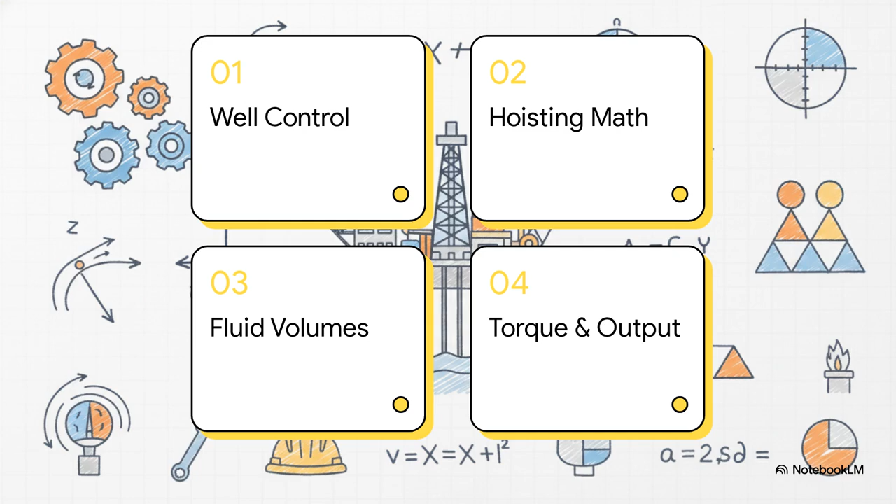Section 1. Pressure limits and well control. The power of squeezed gas. Think about this. If the rig loses all power and you've got a high-pressure gas bubble climbing fast to the surface, how do you slam the blowout preventer shut? Well, the answer lies in the accumulator and the math of squeezed gas. The accumulator uses nitrogen gas to squeeze hydraulic fluid, storing up emergency power. But how much power do you actually have?

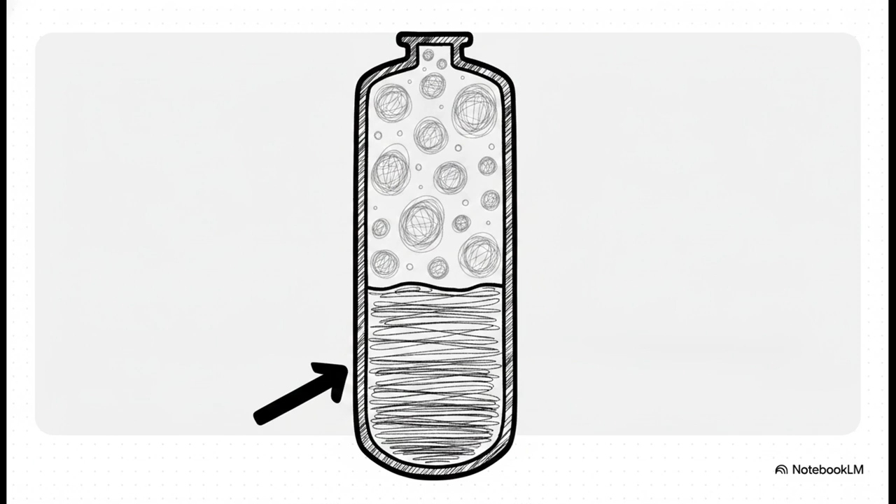According to Boyle's law, which tells us that pressure and volume are inversely proportional, a gas compresses, but a liquid doesn't. So an 11-gallon accumulator bottle, pre-charged with 1,000 psi of nitrogen, does not give you 11 gallons of fluid, because the gas takes up space. It actually only gives you about 5 usable gallons.

So this crucial point is summarized perfectly by this rule of thumb. A full accumulator gauge does not mean a full accumulator. A gauge reading 3,000 psi only tells you the fluid is pressurized, not how much nitrogen is pushing it. If your nitrogen slowly leaked out over time, the gauge might still read full, but you'd have zero pushing power. Trusting that gauge without physically verifying the nitrogen precharge, that is a fatal trap.

And what exactly is that accumulator fluid pushing against? The blowout preventer stack. An annular preventer is rated to hold back working well pressures of 5, 10, or even an extreme 15,000 psi. Yet, it only takes about 1,500 psi of hydraulic closing pressure to shut it. Why? It's a deliberate mathematical design. That much lower closing pressure squeezes the reinforced rubber iris shut around the pipe without over-crushing and destroying the rubber element itself.

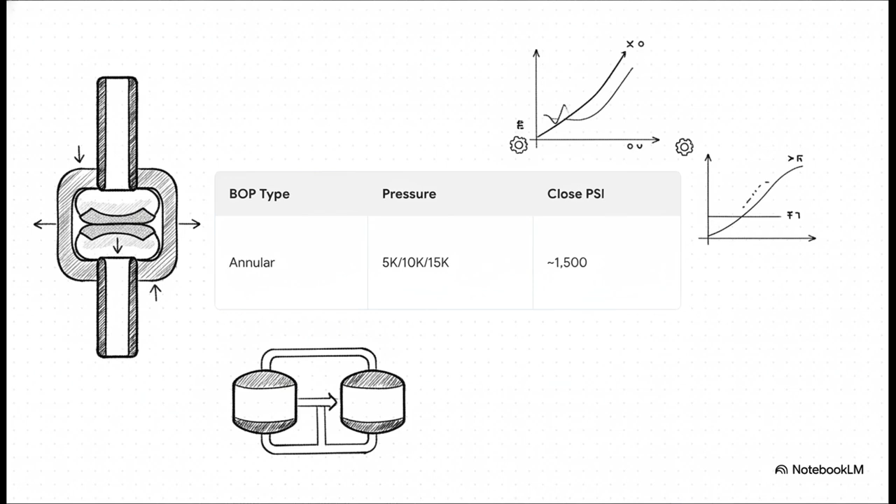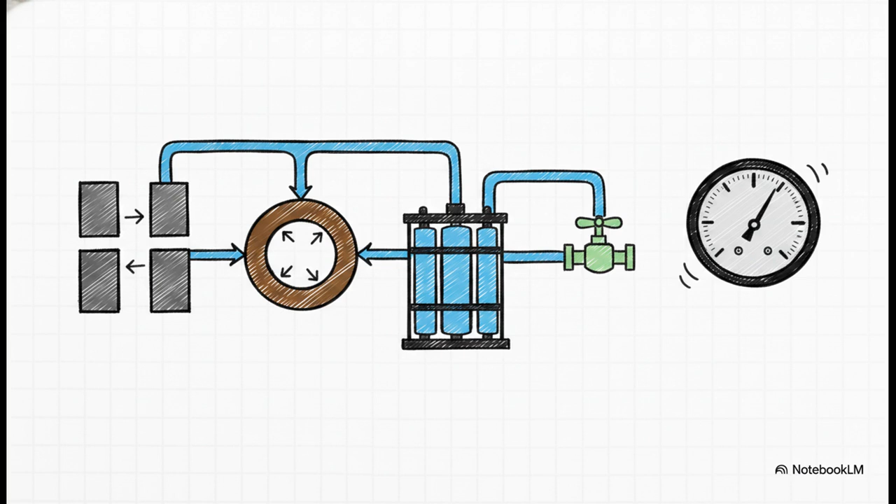To prove this system actually works, the industry relies on the strict API 16D rule. Your accumulator must have enough calculated fluid volume to close all the pipe and shear rams, close the annular preventer, open the hydraulic choke line valve, and, here is the real kicker, still retain 200 psi above the nitrogen precharge. It's an uncompromising math test, and it proves well-control readiness before an emergency ever happens.

Let's move to Section 2. Hoisting and weight dynamics, mathematics of lifting. Moving up into the air, we are introducing the mathematics required to handle hundreds of thousands of pounds of steel hanging directly over an open hole. Gravity never takes a day off, and neither does the math keeping it in check. You see, rig hoisting is like a chain, and the load flows through every single link.

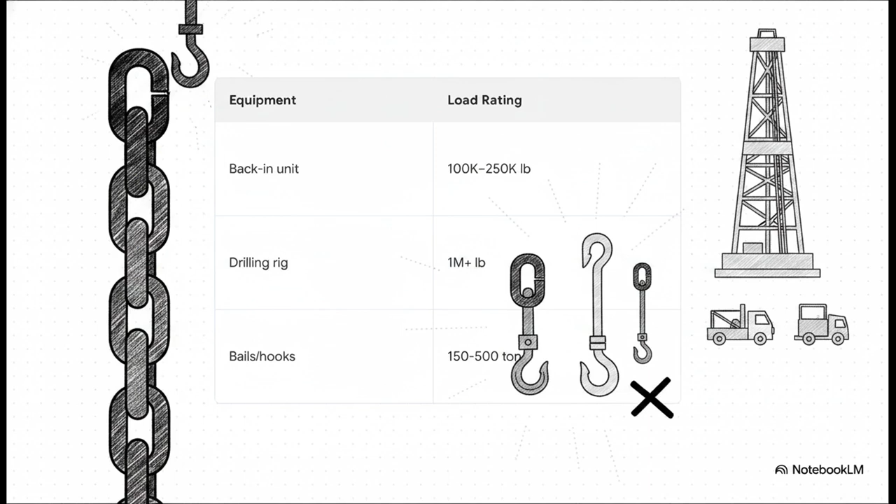Contrast the massive 1 million plus pound rating of a drilling rig against the 100 to 250,000 pound rating of a smaller back-in servicing unit. Everything connected to these systems, the hook, the bales, the elevators, has to match or exceed these exact tonnage classes. If you accidentally put a 150-ton bale on a 500-ton hook, that weak link immediately becomes a deadly liability.

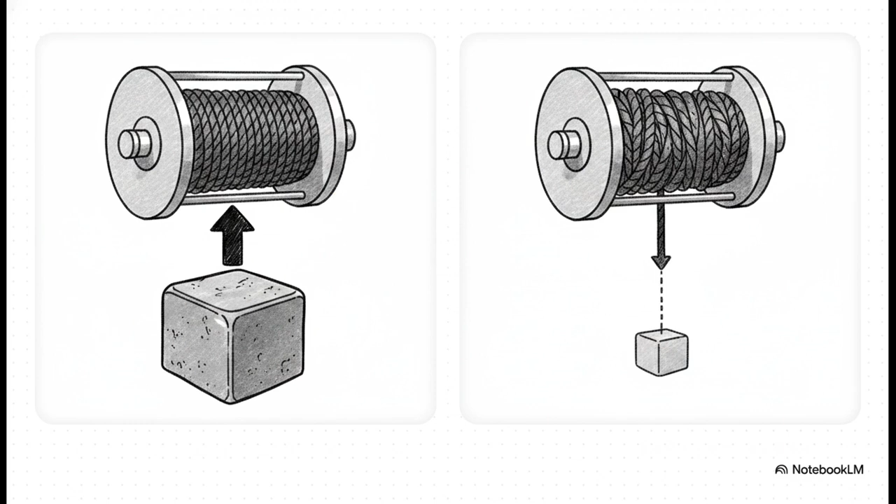And this brilliantly illustrates the danger of assumptions when lifting. On the rig floor, air hoists or tuggers lift the heavy tools. But look at this comparison. An air hoist's stamped capacity rating literally only applies to the very first layer of rope on the drum. Because torque equals force times radius, every extra wrap of rope on that drum increases the radius, which mathematically reduces what it can safely lift. If you have 4 layers of rope spooled out, your 3,000-pound hoist might only be able to lift 2,000 pounds safely. Let's shift and look at weight applied downward.

Weight on bit, or WOB, is the precise downward force the driller lets rest on the bit to actually crush the rock. For a roller cone bit, the sweet spot is typically 3,000 to 5,000 pounds per inch of bit diameter. And here is a real rig secret for you. Slow drilling usually means a dirty hole, not a dull bit. You absolutely must diagnose your fluid hydraulics before you simply add more weight.

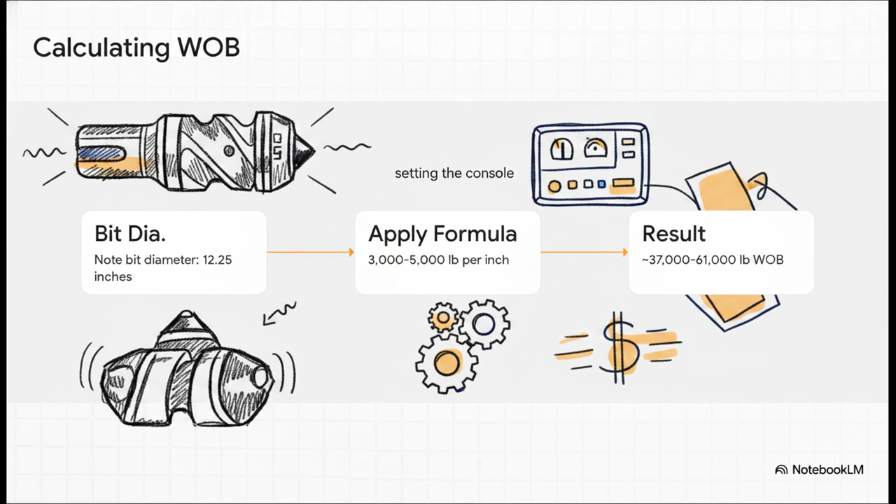Now, what's really interesting is how simple this math actually is in practice. Walk through this with me. Say you have a 12¼ inch bit. Apply that formula of 3,000 to 5,000 pounds per inch. Boom. The driller immediately knows to set the console for roughly 37,000 to 61,000 pounds of weight on bit. That specific math ensures they maximize penetration without instantly destroying a $30,000 tool.

On to Section 3, Calculating Fluid Volumes, the Hidden Geometries. When you are pushing drilling mud 2 miles deep into the earth, you obviously cannot see where it's going. You can only calculate it. So understanding the math of empty space is absolutely critical. The most important empty space on the rig is the annulus. That's the ring-shaped gap between the drill pipe and the hole itself.

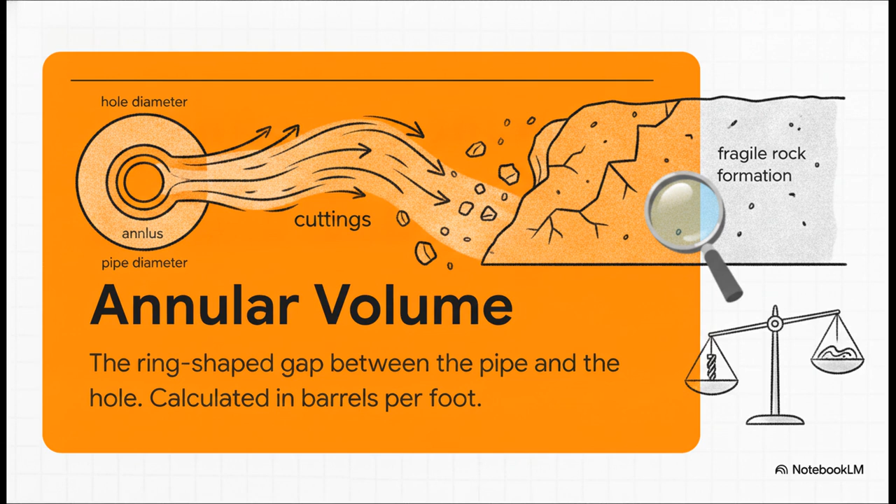The math to find its volume is the hole diameter squared minus the pipe diameter squared divided by 1029.4. This gives you barrels per foot. It's a delicate balancing act. A narrower annulus means faster fluid that cleans cuttings out better, but that exact same friction puts much harder pressure on the fragile rock formation.

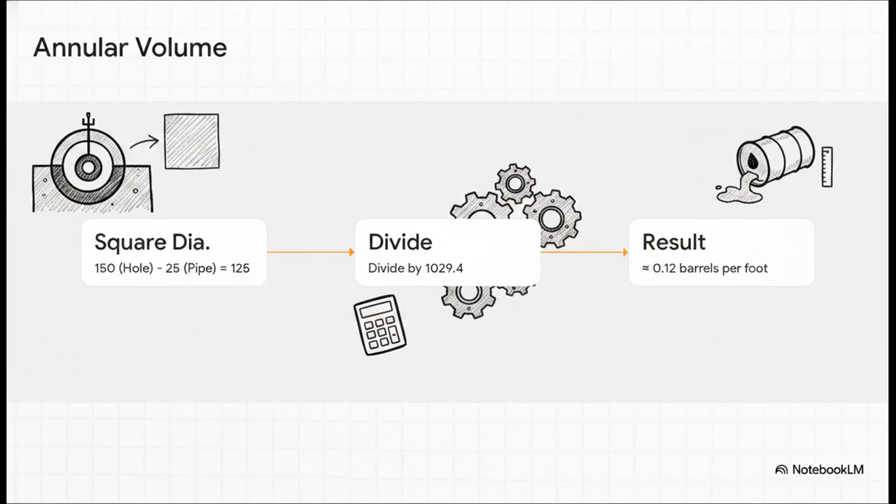Let's do a quick mental check, just like a driller does right on the floor. Take our 12¼ inch hole. Square it, you get about 150. Take a 5-inch drill pipe, square it, you get 25. Subtract them to get 125. Divide that by our constant, 1029.4, and your result is about 0.12 barrels of fluid per foot.

So why does that exact 0.12 number matter so much? Because of this hard-hitting rule right here. Mud pumped in must exactly equal mud returned. If you calculate that you should get 0.12 barrels back per foot and you get more, the formation is kicking gas into your well. If you get less, your mud is leaking out into the rock. That math is literally your one and only early warning of a blowout.

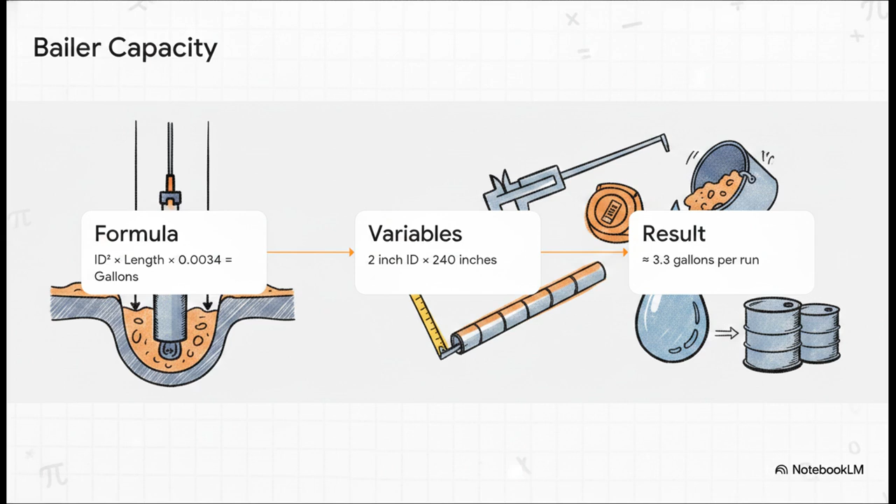Volume math also dictates well servicing. For instance, if you're using a wireline bailer to clean out sand, the volume formula is the inside diameter squared times the length in inches times 0.0034. So for a 2-inch diameter tool that is 20 feet long, you only pull about 3.3 gallons of debris per trip. The math proves that bailing is agonizingly slow, which forces crews to plan these cleanout trips very, very carefully.

Finally, Section 4, Torque, Output, and Production, Mechanics in Motion. Once a well is actually drilled, the continuous dynamic forces of fluid rotation, artificial lift, and pneumatic power completely take over. First up is the slip velocity principle. Basic physics tells us that debris will sink through a fluid at a specific rate. If the mud is moving upwards slower than that sinking rate, which we call the slip velocity, the debris settles out. This is exactly how hole cleaning junk baskets work. They deliberately create a wide spot in the drill string where mud velocity drops, allowing heavy junk to just fall harmlessly out of the flow and into the basket.

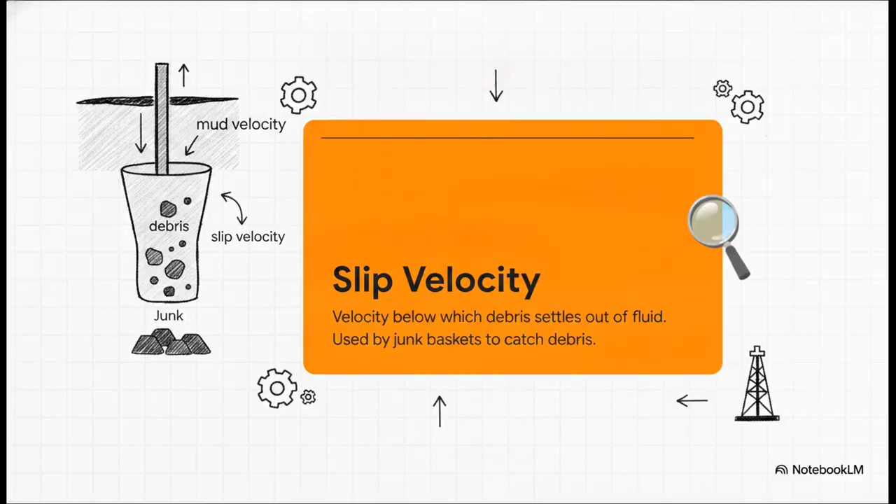Now once we strike oil, we use pumping units, or pump jacks, to get it out of the ground. Production sizing is basically an algebra equation. It combines stroke length, strokes per minute, the pump's plunger area, and overall efficiency, all multiplied by 1,440 minutes in a day to give you barrels per day. You don't have to guess the output. You can calculate it down to the exact barrel based on these exact mechanical settings.

And just looking at the stroke length variable, these units typically range from 40 to 192 inches. The math reveals a vital safety and efficiency secret here. Simply doubling the stroke length will perfectly double your production without having to speed the unit up at all. This keeps those massive steel counterweights safely ticking along at a nice, steady 6 to 12 strokes per minute.

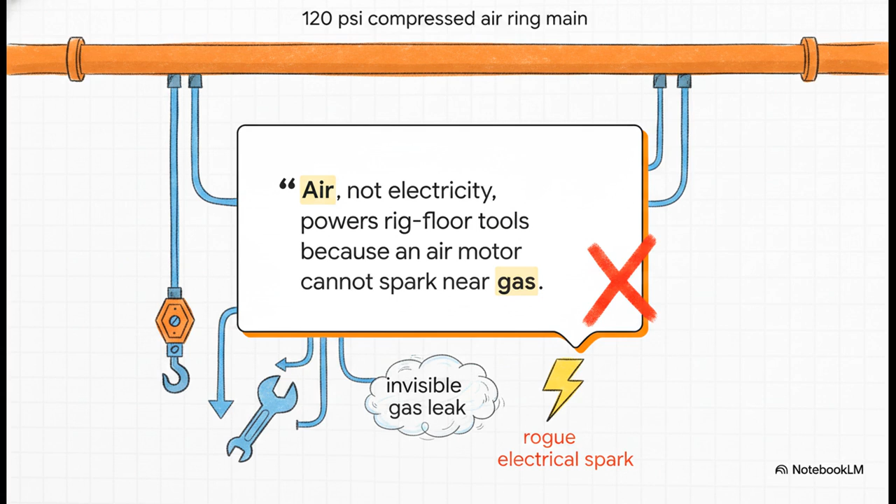Wrapping up our mechanical forces, we have to look at the rig floor's power source. Rigs use a 120 psi compressed air ring main to power hoists and tools, rather than electricity. Why? Well, as the quote says, an air motor physically cannot spark. This merges the physics of compressed gas with the harsh reality of safety. Just one rogue electrical spark near an invisible gas leak on the floor is all it takes to lose the entire rig.

Which leaves us with this final thought for today's explainer. When you look at an oil rig holding back 15,000 psi of explosive pressure, suspending 1,000,000 pounds of iron over a hole in the ground, what are you really trusting? The massive steel you can see with your own eyes, or the uncompromising invisible math that dictates exactly how that steel behaves? The equations don't bend, and they don't break, and that is exactly why they keep the crew alive.